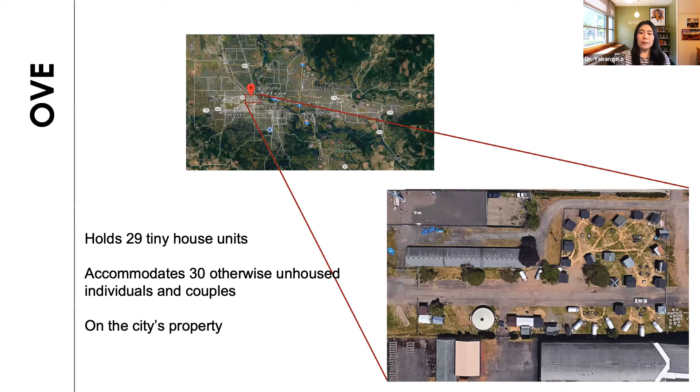Currently, there is not much vegetation on site, and planting edible crops in the soil is not allowed because of the potential toxicity of previous activities on site. So the production of food is limited to raised beds that are often underutilized because of the low availability and high cost of water, resulting in poor resident engagement.

Roughly 70% of such sites sit on impervious surfaces, and there is minimal tree canopy. Because of the small unit size of the tiny houses and the features of the sites, the residents are vulnerable to extreme seasonal temperature variations, which are becoming hotter and more frequent due to climate change.

The tiny house units have some insulation, but they are not connected to electricity or plumbing, and that's not simply enough for the increasing temperatures and cold winter. The large building to the south of OVE blocks winter sunlight access to the Conestoga huts, which has been causing mold and thermal discomfort and health issues.

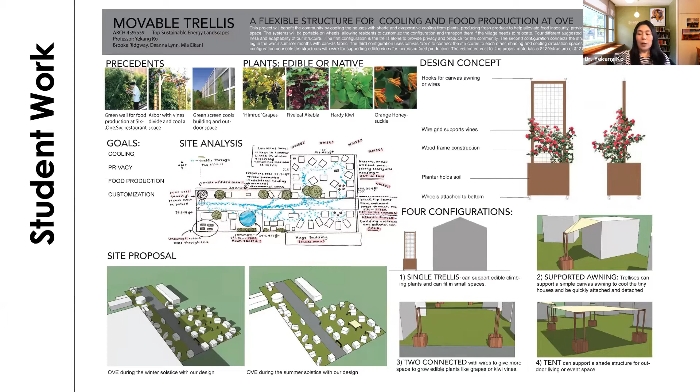In summer 2019, FOH students built this prototype for the movable trellis idea.

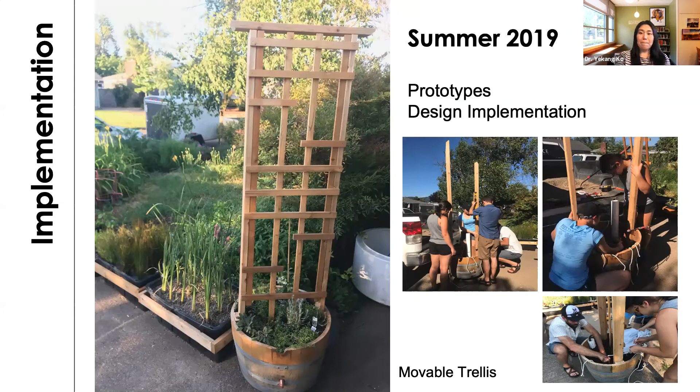In spring 2019, we held a co-design workshop to understand the condition and spatial value of sites from the viewpoint of the residents. Students built a model of OVE, and the residents worked with the physical pieces of the model to demonstrate the best locations for shade and vegetation. The model was useful for sharing our ideas and letting residents share their ideas and test designs. It gives a sense of the physical dimensions of our interventions and helps develop new ideas while working with the community.

The residents expressed preferences from the activities, like privacy from the streets and specific locations for improved green space, creation of public spaces in different locations throughout OVE, and automated water irrigation.

We also had a sticker mapping exercise. Residents were asked to put a star sticker in places they would like to have additional shade, and a veggie or flower sticker in a place they would like to have more vegetation.

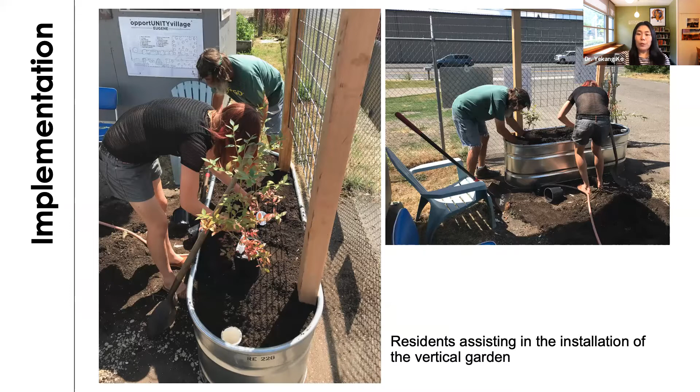Based on the community input, residents and students collaborated to build an additional movable trellis design. Collaboration on building physical landscape installations with the residents would provide them with a sense of ownership over the planters, with the hope to improve the pattern of maintenance over the years.

These are examples of vertical gardens that provide food and engagement with residents for skill training, and most importantly, privacy from the street, which was mentioned in our community workshop. The hydrofarm meter tests moisture, light, and pH level of the soils in trellis planters and is connected to drip irrigation to help with maintenance.

Our students, Sam Malik and Adam P., moved forward the shower and shade proposal to build gray water filtration planters for tree propagation. They held a co-design workshop to help inform the aesthetic appearance of the planter boxes, and to achieve this, OVE residents collaged together a variety of different printed materials to design their ideal planter boxes.

The team developed examples of ways to clad the exterior of the planter boxes based on the residents' input, and held a charrette to explore where residents wanted the planter boxes located. Based on technicalities in filtering the gray water through the boxes, we ultimately did not follow what the residents had proposed. Still, this informed us where residents may want to see more typical planter boxes throughout the site.

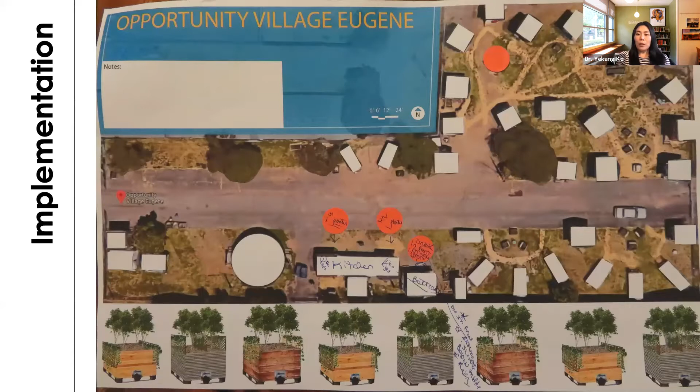The FOH team brought all the materials for the planter box installation, and residents were invited to help with the installation process, including making final decisions on box locations, adding soil, and planting trees. These planters were installed right before the pandemic began, February 2020.

During the pandemic, our project had to be on hold for a while, as you can imagine. We gradually began our design and construction on campus from summer, not at the village, for safety, and had several Zoom meetings with villagers over the winter term. This spring, we started visiting OVE again with caution and all safety measures.

With full support from the City of Eugene Urban Forestry Manager, Scott Altenhoff, we are excited to implement our tree propagation program to provide small nursery stock for the City of Eugene. We hope this program generates sustainable revenue for the village, and that residents enjoy the ecosystem services of those trees while they are growing.

So while doing our projects at OVE and talking to various community partners, I found that we need a more systematic and proactive approach to the unhoused issues at a citywide level.

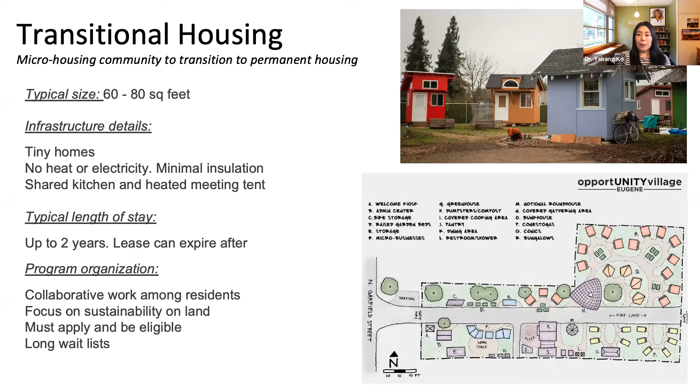Like rest stops, transitional housing communities like Opportunity Village Eugene provide temporary accommodations, but with more supportive community governance and structures such as common kitchen, gathering area, showers, and restrooms. Although the maximum length of stay is limited, usually up to two years, transitional housing can play a critical stepping stone from emergency shelter to permanent housing.

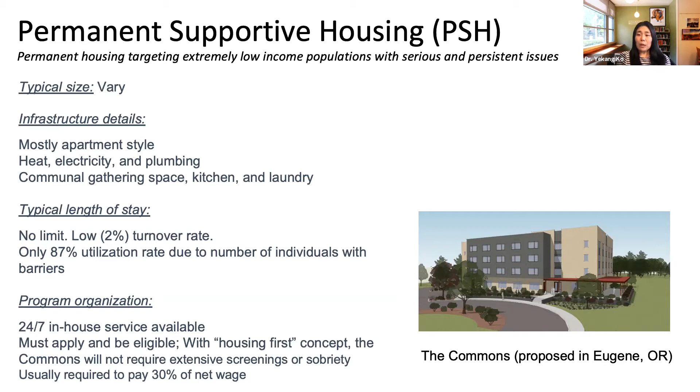Permanent supportive housing combines affordable housing with voluntary supportive services intended to build capacity for independent living and tenancy, and connects residents with health and employment resources. Permanent supportive housing has been proven effective in decreasing chronic homelessness, increasing housing stability, improving health, and reducing public costs associated with using emergency services like hospitals and jails.

In 2018, Lane County and the City of Eugene commissioned the Technical Assistance Collaborative, known as the TAC Report, to study homelessness in the region and develop a series of recommendations on how to address the growing issues. Our studio reviewed this study as a baseline for our project.

So their primary recommendation for a citywide strategy to address the homelessness crisis includes adding 75 additional emergency beds and 350 units of permanent supportive housing. So basically they recommend expanding the emergency shelter capacity as well as the permanent supportive housing capacity, but not the transitional housing community, in order to facilitate the transition from the emergency shelter directly to the permanent supportive housing.

However, we found that even if we all follow the TAC report recommendations and implement them, approximately 283 units would still be needed to meet all the housing needs.

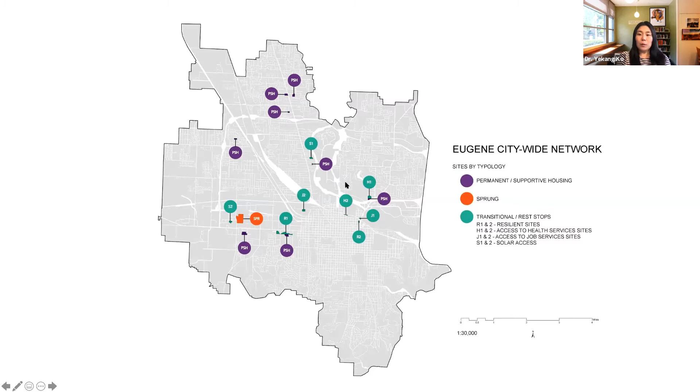The studio identified one emergency shelter, shown in orange, 8 transitional housing communities, shown in green, and 8 permanent supportive housing communities, shown in purple. In support of the citywide network, student participants created several design solutions for various housing typologies.

The Honeycomb Village is inspired by the shape of the honeycomb for the best thermal comfort. This village is composed of modular tiny houses that provide users with a series of private and shared spaces and thermal controls for maximum comfortability. The units were designed to be customizable and flexible with seasonal changes, and adaptable to expansion and compression of unit configurations.

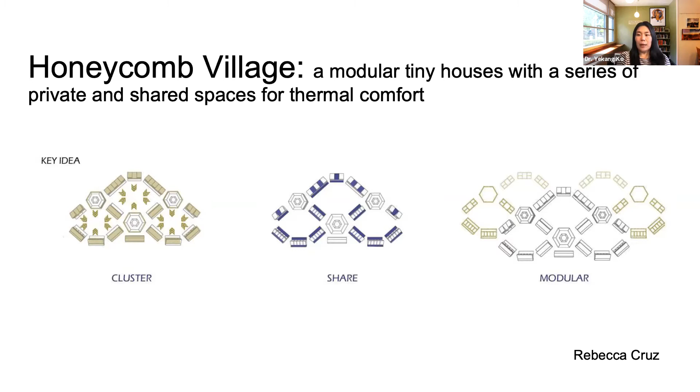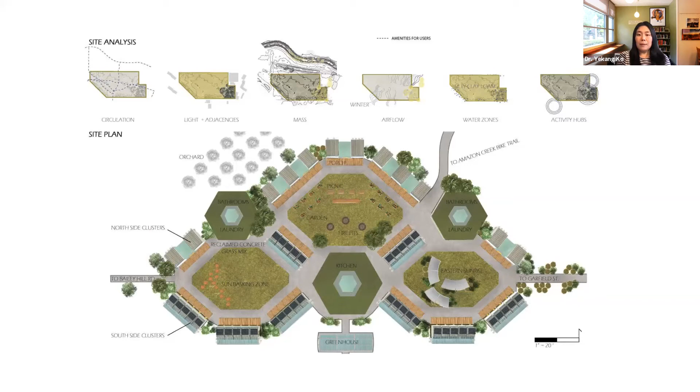The housing units form the outer layer of the honeycomb, with shared amenities such as kitchen, bathroom, and laundry positioned as nodes along the boundary. Within the outer boundary are open spaces, each with its own theme and programming.

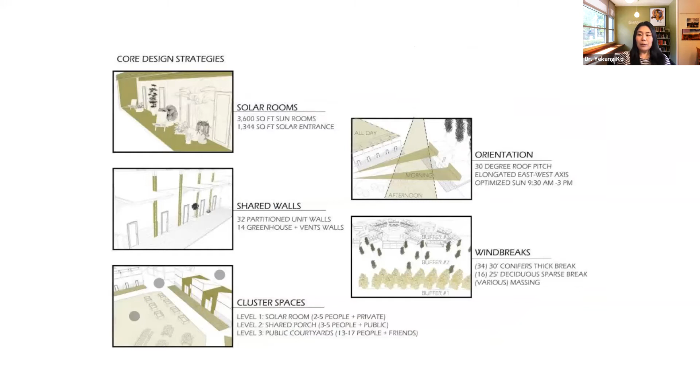The housing units themselves are also modular and offer flexibility in responding to ambient conditions throughout the year. Removable walls, adjustable overhangs, and window installations allow for maximum control of lighting and ventilation depending on the season and even the time of day. Finally, many social design elements are integrated throughout the complex, including shared front porches, customizable and raised planters, picnic tables, and shade and pergola structures.

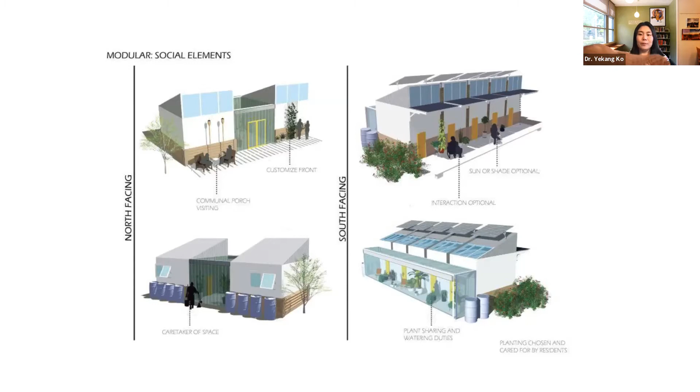So these are the perspectives of the Honeycomb Village.

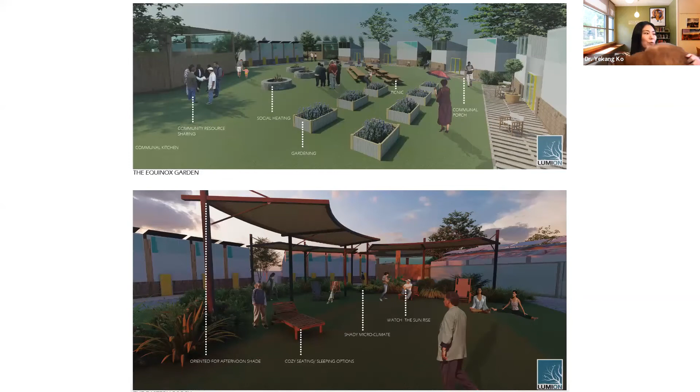The second proposal was the Cultivating Resilience plan, which envisioned a city park that embraces the homeless populations already using the space for transitional shelter, while enhancing the park quality for neighbors and increasing resilience. It envisions the park being transformed broadly into 3 zones organized along a gradient from public, to semi-public, to private transitional housing communities.

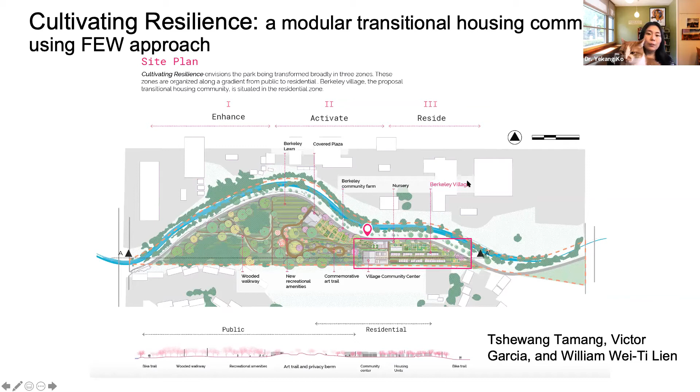The transitional housing community has a modular, off-grid infrastructure that can be rapidly deployable and removable while providing basic needs like food, energy, and water on site.

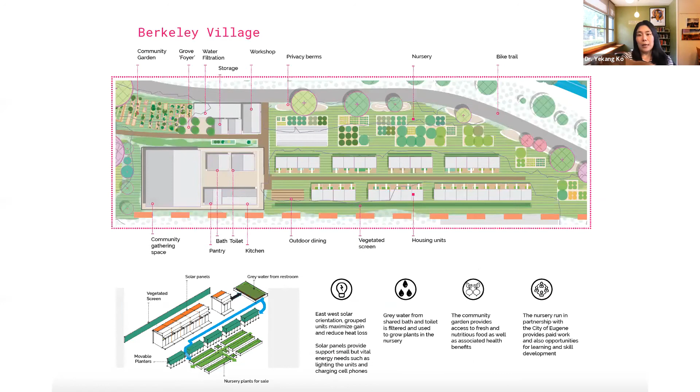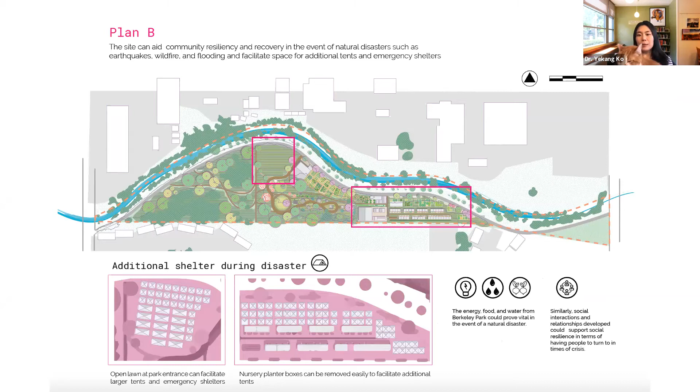The Plan B illustrated how the space can be used for respite shelters in case of emergency. While this plan was quite a radical idea when it was developed in the studio in 2019, emergency park usage has actually been implemented in Eugene during COVID-19.

And the third proposal was the EDI. This EDI focused on the fact that 1 in 3 LGBTQ youth has been the victim of a hate crime, and 1 of 5 LGBTQ people experiencing homelessness has been unable to access short-term shelter. And outside of major cities like New York or LA, there are very few programs that cater specifically to the needs of LGBTQ youth experiencing homelessness.

LGBTQ seniors often struggle to find age-appropriate housing where they can be themselves without fear of judgment. So this EDI proposed a supportive housing community for LGBTQ folks of all ages who have experienced or are at risk of experiencing homelessness. This integrated supportive housing model combines permanent and transitional housing on the same site with supportive services for queer folks of all ages, as well as gathering spaces for the broader LGBTQ community.

The transitional housing on site is intended to give youth and adults recovering from abuse and other issues a place to live for up to 2 years. The permanent supportive housing is for folks with chronic issues like disabilities or substance use disorders who need long-term assistance. The permanent housing can be used for residents who have recovered from earlier trauma and abuse and can perform community jobs such as peer counseling, teaching job skills, and community management.

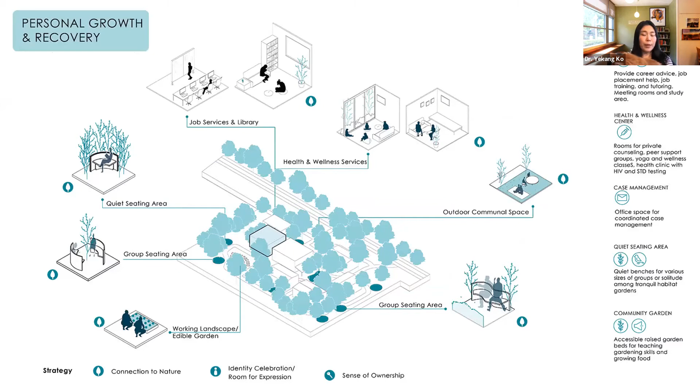So with these 3 goals, they came up with various programs with the strategy of connecting to nature and identity, celebration and room for expression, and providing a sense of ownership.

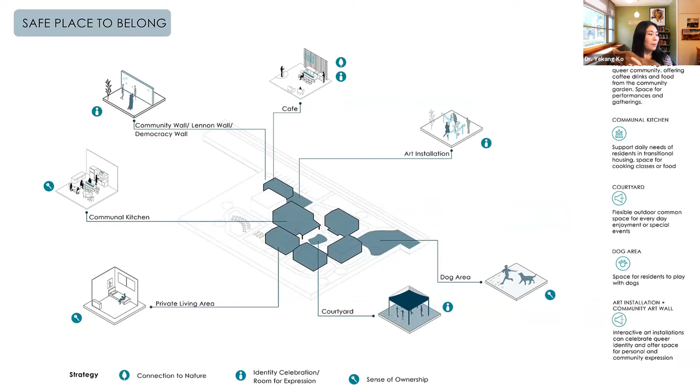Same for the safe place to belong. For this integrated housing, combining transitional and permanent housing could help maintain the stability of the community and form a support network. LGBTQ youth would have the opportunity to benefit from the experience of their elders through mentoring programs, and residents could potentially move from transitional housing into permanent housing without having to leave their newfound community.

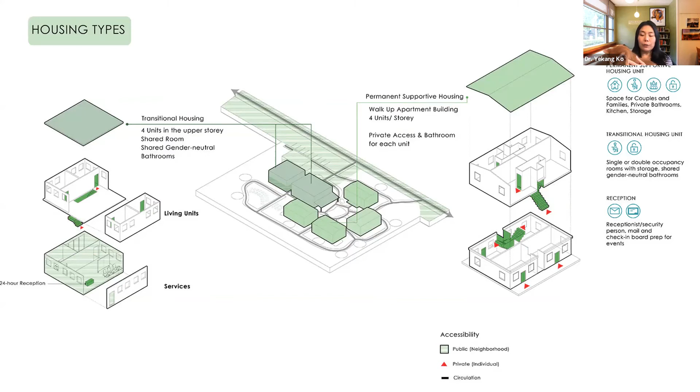Design professionals working with multidisciplinary experts can contribute solutions towards addressing the housing crisis through innovative and collaborative design interventions. With this in mind, our team has expanded as an interdisciplinary group of experts, including landscape architects, product designers, urban planners, environmental engineers, scientists, philosophers, and management specialists.

We are in the process of implementing our tree propagation plan for a community nursery idea with a food, energy, water nexus. We have been conducting several surveys and interviews from the residents of OVE, and we are going to continue this process to measure satisfaction level, improvements of quality of life, and feedback for design interventions.

We revised design implementations based on the data analysis from surveys and monitoring. And we are continuing to involve students through research and thesis projects for the Landscape of Humanity projects.